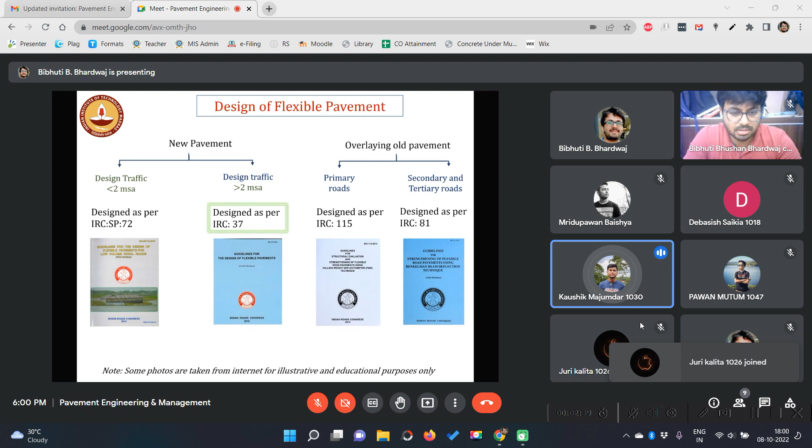So you guys are back to Jorhat or at your houses now? Sir, we still have our holidays up to tomorrow, so we'll be back. Okay, so by tomorrow. So is any one of you doing 7th semester projects in highway or related to transportation? No one? Sir, our projects have not yet been decided. We have just only been given our groups. Okay, okay.

So how is the placement scenario in JIST? So last year, what is the percentage? Sir, we are not actually that aware of the placement scenario. We do not have any ties with specific companies which give us placement, so the students do it mostly by themselves. But this year, they are supposed to bring some campus placements. So you are which batch? Like the first batch graduated in which year? The civil? So the first batch was in, sir, 2020. We are the fourth batch. Fourth batch. Okay.

See, pool campus is always an option. So you better tie up with JEC, AEC, because in my case also, I was from the first batch of Tezpur University. At the time, since it was the first batch and the rank was also not that much, many companies were reluctant to come. So we explored this pool campus. We tried to tie up with AEC, then other NITs, and it worked also. In the first batch, most of the students got selected in campus placement. So we tried that way also.

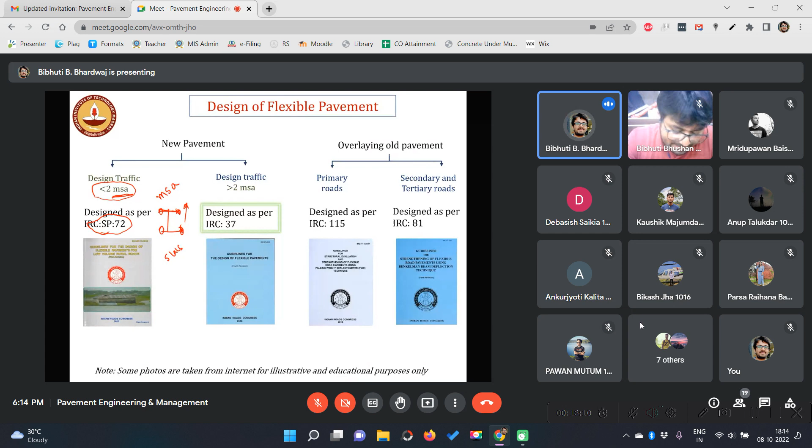MSA. Million standard axles. Very good. So what is this million standard axles? So suppose a vehicle is there. This vehicle has how many axles? 2, right? So like that, if this vehicle goes through this road for say 5 lakhs numbers of times, then total numbers of axles that passes through this road will be 5 lakhs into 2, right? 5 lakhs into 2 will be 10 lakhs. So that will be 1 million axles.

But what is this standard? Because this vehicle can be a car. Another vehicle can be one truck. The old trucks have same axle configurations, one axle at the front, one axle at the back. So do you think the damage caused by this car and the damage caused by this truck will be same? No. The damage caused by this truck will be always higher. How much higher? That we will discuss in details.

Okay, but just remember this million standard axles means, suppose you are designing this road for 15 years. So in 15 years, how many standard axles will pass? So that count is called standard axles. How many million axles? Say like 6 into 10 to the power 6 is the total axle count. So we can call it directly 6 MSA. So 6 MSA means that road cannot be designed as a rural road.

We have to move to this category, that is just a normal flexible pavement. In most of the state highways, even major district roads, national highways, expressways, the traffic will always be greater than 2 MSA. Alright, so in that case, we will focus in this course mainly on IRC 37 because IRC SP72 is very simple. Some standard thicknesses are given, so you need to just check whether it is enough or not. So this IRC 37, you have to master it because many questions come, especially in GATE, in interview also.

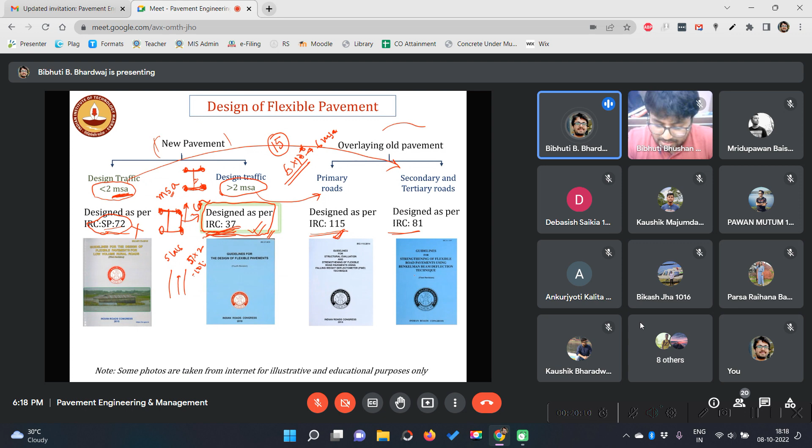Now coming to design. So when you say designing a road, what does it basically mean? Does it mean the width of the road? Does it mean the curvature? Does it mean the thickness? What do you think designing a road means in the context of pavement engineering? Yes? Selection of materials and determining the thickness. Yeah. So in the context of pavement engineering, designing a road always means you need to find out the thickness of different layers, and also you need to determine what are the materials to be used in all the layers.

Just like in building, from a layman point of view, when you tell someone that I am designing a building, the person will think that some kind of aesthetic beauty is attributed to the building, how the sunlight is coming, all those things. No, that is the job of an architect, not an engineer. So as an engineer, what do you design in a building? Anyone? So the dimensions of the various columns, beams, and the structural elements.

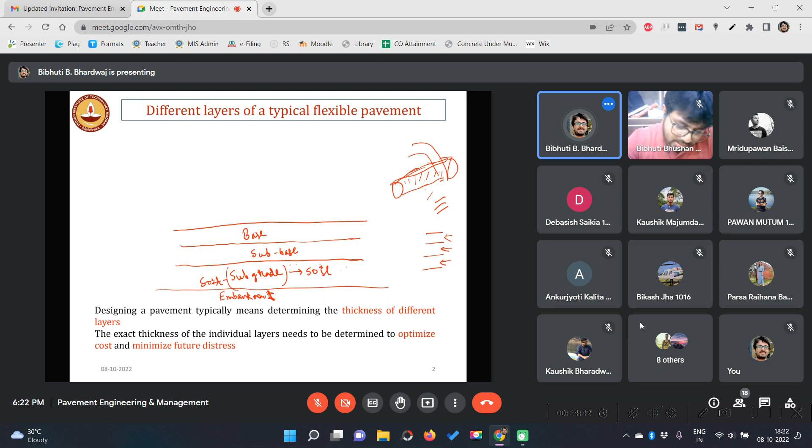Then, sir, subbase course. Subbase, very good. Subbase, and over that, the base, over that, binder. Binder, and what is the... surface course. Surface, or we also sometimes call it wearing course. Okay, so why do you think we need different types of layers? Does it have anything to do with the function of layers? So which layer is the most expensive one? Would you tell me which is the most expensive layer?

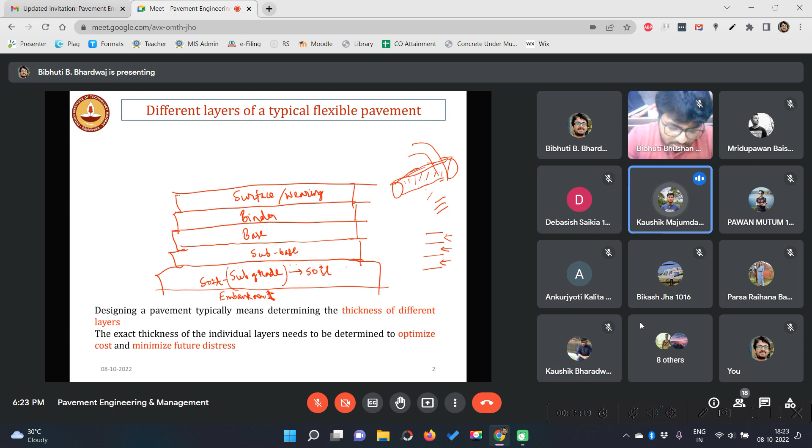Surface course. Surface course, because we use bitumen. Bitumen is also called black gold because it's very costly. 1 kg of bitumen is almost 45 rupees per kg. Okay, so that's why bitumen is called costly, and that bitumen we are using here. So this, of course, is a very expensive layer. Okay. So then we have binder course. So in binder course also bitumen plus aggregate. In surface course also bitumen plus aggregate.

In base course, what do you have? What do you think? Something inferior to this layer, bitumen plus aggregate, but superior to soil. What do you think? So only aggregate. Aggregate. Okay, but aggregates, don't you think it will be very loose? It will not be bound together. If you think about surface course, these aggregate particles are bound by this bitumen. Bitumen is a binder, isn't it?

Just like concrete. In concrete, the binder is cement plus water. Cement plus water becomes a hydrated product, so it binds the aggregate together. Right. So similarly, in bituminous mix, the bitumen is a binder that binds the aggregate particles together. Okay. So what do you think? What material will bind these aggregate particles here in base as well as in subbase? So soil. Soil. So I will ask a question now.

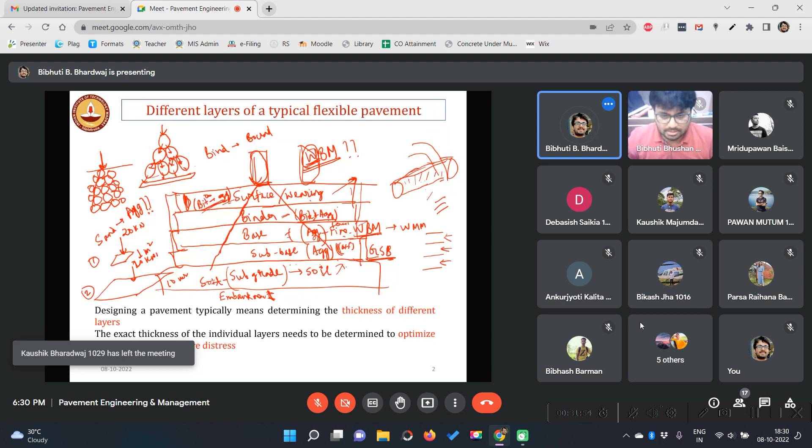So if my area is suppose 1 meter square, and I apply a load of say 20 kilonewton, and if my area is say 10 meter square and I apply the same load 20 kilonewton, so where stress will be more, case 1 or case 2? This one. Case 1, because stress is basically force by area. So since the area is increasing because of this contact of the aggregate particles, the area is increasing when we go down.

Okay, so what do you think? The stress here, if I take a point here and if I take a point here, where stress will be higher? Here or here? 1 or 2? So 2. Why? Anyone else? No, sir. It was my mistake. It's actually 1, sir. One. Yes, sir, because the area is much smaller.

Area is smaller here. So similar, just like this example. Okay, area is smaller here. So the same load, area is smaller than this one. So here stress will be more. Suppose I call this sigma 1. It's my stress at this point, and at this point my stress is sigma 2.

Okay. Now, in any kind of design, let it be building design, let it be road design, let it be even some mechanical design, as an engineer, what we have to ensure? That something doesn't fail. To ensure that something doesn't fail, what do we have to ensure? If I say that, so if I have a concrete cube, you must have done this test, right? Test of concrete cubes. You prepare concrete cubes, you apply load, right? So you are increasing the stress basically, right?

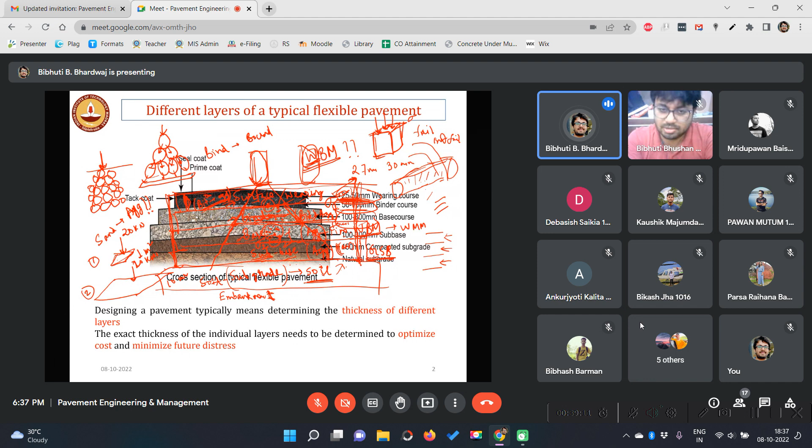Anyway, there are some other layers also, like seal coat, prime coat, and tack coat. So are you aware of this? What is seal coat, tack coat? Yes, sir. No. How to remove?

Okay, so this seal coat is applied on the top when the final layer is applied. It is basically a mixture of bitumen emulsion and sand. It is just sprayed on the top. You must have seen some kind of spray at the backside of the truck. So this is seal coat. Sometimes it's sprayed with some sprayer also.

So this seal coat, as the name suggests, will seal the pavement, because sealing it is very important. Otherwise, if water percolates through the pavement, it will be a problem. Say these aggregates are now bound by bitumen. We have used bitumen to simply keep the aggregates in place, right?

But when water comes in contact with this mix... in cement concrete it's the other way around. We need water to come. For which reaction, for which mechanism? Why do you need water in cement concrete? Come on, as a civil engineer. Sir, for setting. Yeah, the process is called hydration, right? Because it will lead to the hydration of cement. But in case of bituminous mix, it's the other way around.

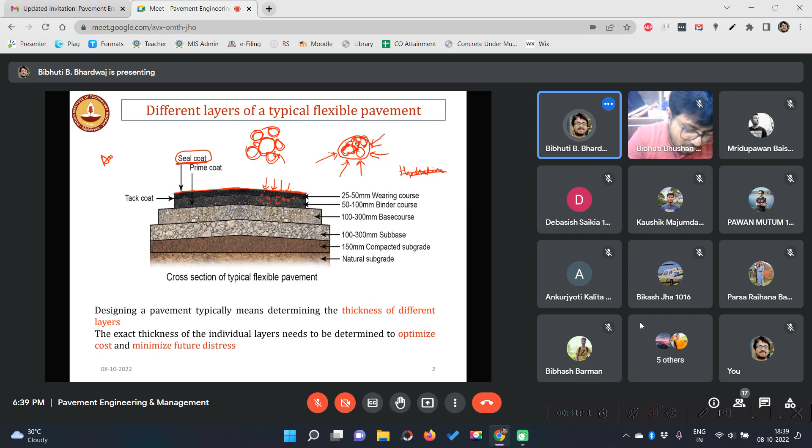These aggregates are coated with bitumen, and they are together. So when water comes, generally these aggregates are called hydrophilic. Any idea what hydrophilic means? Attracted to water molecules. Yes. So this word philic means attraction, and what is the opposite of philic? Phobic. So hydrophobic means it hates water, but philic means it loves water. So this aggregate loves water.

But forcefully it is married with this bitumen. Now when water comes, since the aggregate loves water, it will tend to get attracted to the water, and because of this the bitumen coating comes out. We discussed in our last class what happens when the bitumen coating comes out. The aggregates are no more bound. Bitumen is the binder which was binding the aggregates in place. When the coating is not there, the aggregate will be loose, so whenever a vehicle comes, the aggregate will come out here and there. And like that, what is created?

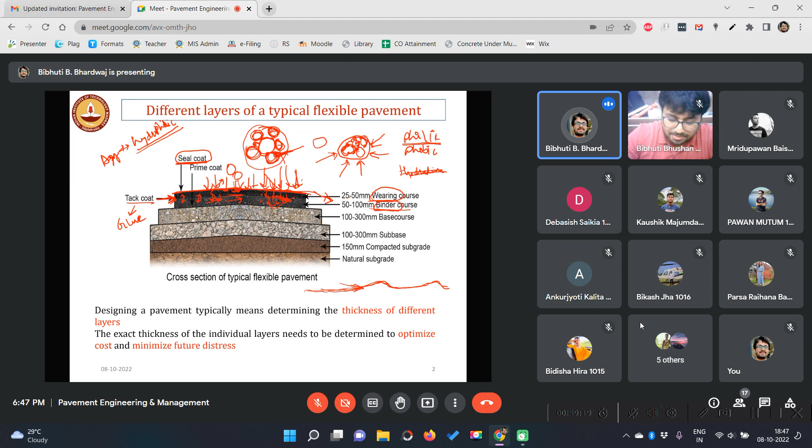We learn these things in detail when you study rehabilitation of pavements, but it's called shoving or sometimes corrugation, some wave sort of thing. You will see this is where the brake has been applied, this is where the brake has been applied, that's why the layer will look like this.

Okay, understood? So designing a pavement means determining the thickness of different layers, and the exact thickness needs to be determined to optimize the cost and minimize future distress. Till now everything is clear? Yes sir. Okay.

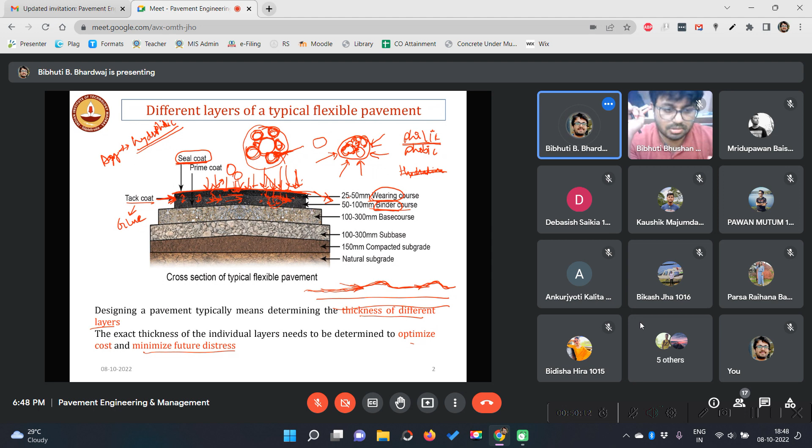See, don't take this class as your normal routine class. You have enrolled this course just to learn something new, isn't it? So you will learn. If you have any kind of doubt that comes to your mind, feel free to ask. There is no silly doubt, every doubt is very genuine. So don't hesitate, you can ask any question related to this course. Any random thought that comes to your mind.

Cracking due to fatigue, not just repetitive strain. Literally, what does fatigue mean? In English, tiredness. So anything that gets tired, you can say the body is in fatigue. When you put in effort relentlessly, working and working, you get tired, right? Just like that, when the pavement gets tired, it cracks - that's fatigue.

Okay, how will pavement get tired? Suppose I give you an aggregate and ask you to break it. Forget about the aggregate, let's say this is a mouse. I have asked you to break this mouse. So what are the options you have? How will you break it?

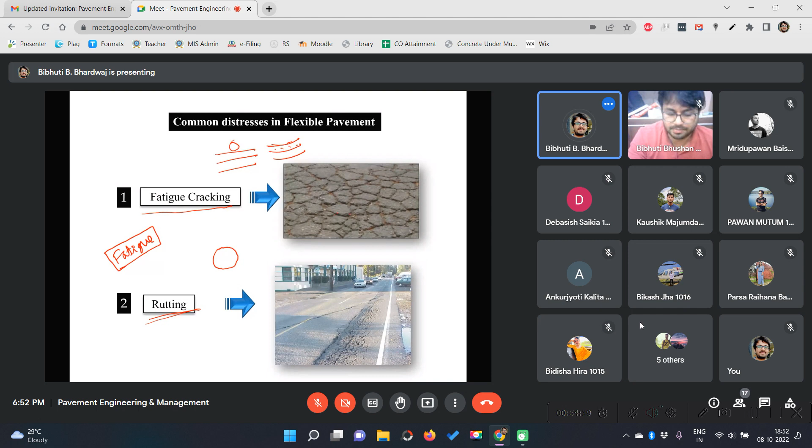So brakes also fail in fatigue, right? When a vehicle moves, the brakes work like this repeatedly, and ultimately it will fail. Similarly, roads also fail in fatigue because flexible pavements flex - flexible means it bends. So when a vehicle comes over this layer, it will bend. Then when the vehicle goes, it will recover - bends, recovers. So when it recovers and bends like this repeatedly, the layer will get tired, and when it gets tired, cracks will appear. That's what is called fatigue cracking.

Okay, rutting - what do you think? Why does this rutting appear here? Along the wheel path where the vehicle moves, you can see some depression. Let me draw the cross section view - it will be like this. Why do you think it happens? Due to some relative deformation of one part of the road. But what can be the fault in that road because of which it is happening?

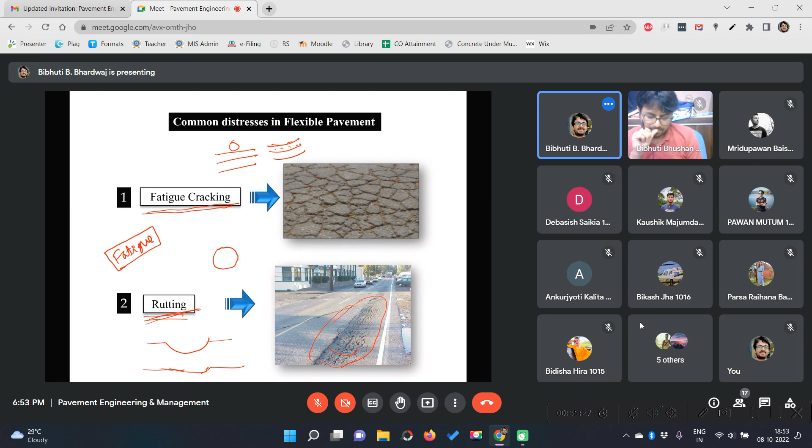So this fatigue cracking is a failure which results from repetitive action of loads. That means you are applying the same load repeatedly, again and again, and ultimately you will see some hairline cracks. It starts with initiation, always with some hairline cracks. You understand the difference between hairline cracks and structural cracks, right? In wall plaster also you see some cracks that are very minute - those are hairline cracks, but these microscopic hairline cracks will develop into some wider cracks.

Macroscopic cracks means you can see with your naked eye - you don't have to see with a microscope. Much wider cracks will be formed, and then these wider cracks will coalesce, meaning they get interconnected with each other, and they form a network of cracks. This network of cracks looks like the back of an alligator or crocodile. So in many textbooks you will see this term also - alligator cracking.

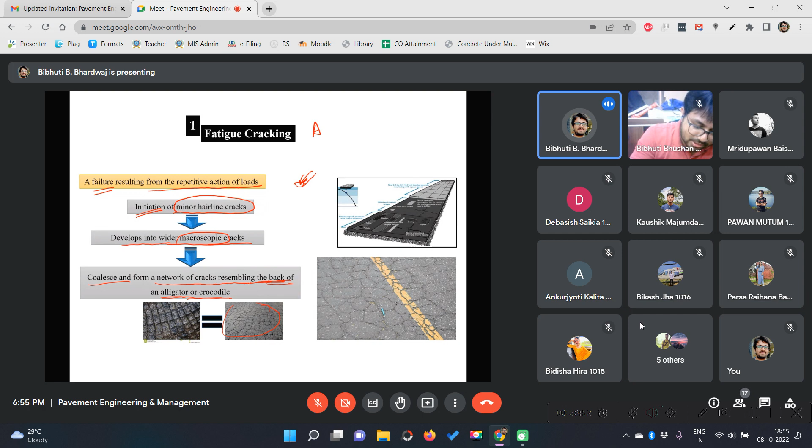Alligator cracking, and rarely in some other textbooks you will see crocodile cracking also. Mainly alligator cracking is the frequently used term for fatigue cracking.

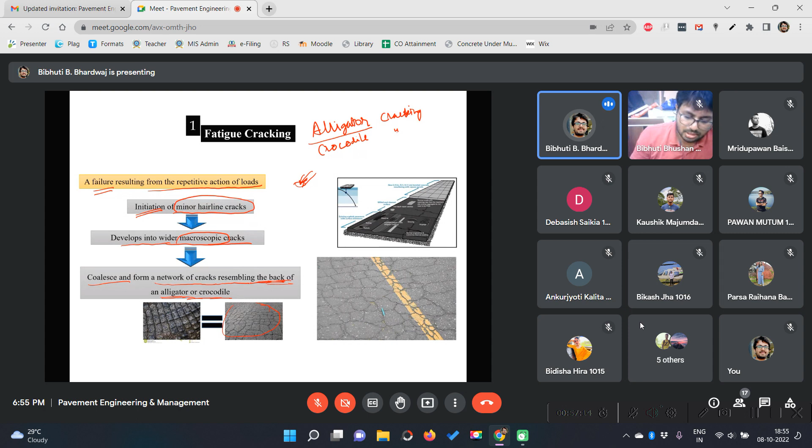So have you understood what fatigue cracking is? Yes, sir. Okay, now the causes can be many.

Mainly it is a decrease in the pavement's load supporting characteristics, because these are the layers. Suppose this entire system is acting in a very good fashion, then it will not fail. But because it is getting flexed and recovering, if these layers are good enough, it will not flex much. But if these layers are soft, it will flex much higher, like this. Or even if these materials are soft enough, it will flex too much. So when it flexes too much and recovers again, just like that, again it will be like this.

So where do you think the cracks will appear first, at the top or at the bottom? So at the top. Why? Because the pressure at the top is much higher.

No, it is not. See, that is the difference between fatigue cracks and cracks formed because of higher loads. Both are cracks, but fatigue cracks are because of getting tired.

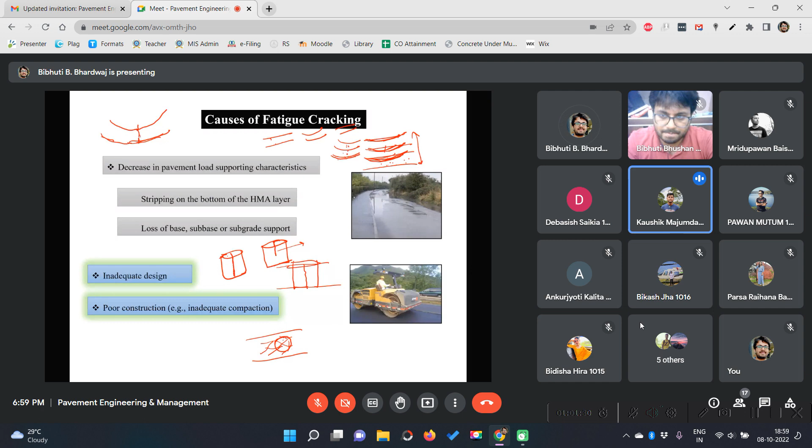Have you understood this phenomena of fatigue cracking? Yes, sir. Okay, so now why will this fatigue cracking happen? Have you ever done any experiments on bitumen, related to bitumen?

No, sir, we have never seen bitumen. We have seen bitumen and we have been given some demonstrations, but we have never done it on our own. But you have an idea how bitumen behaves, right? Yes, sir.

So how does bitumen behave? Is it a solid, a liquid, a semi-solid? How does it behave? It's a semi-solid, sir. At which temperature will it be semi-solid? Sir, at higher than room temperature, like 60 to 70 degrees.

If I heat the bitumen to say 150 degrees centigrade, will it be semi-solid? No, it will be liquid. It will be like water, it will flow like water. You can simply pour bitumen and spread it like anything.

That's why bitumen, when mixed with aggregate, is heated to say 150-160 degrees centigrade so that it becomes like water, very, very less viscous. Then if we simply mix the aggregates, with time the temperature will reduce and ultimately it will become solid again. Then the aggregate particles and the bitumen together, the bituminous mix, will be in a very solid state.

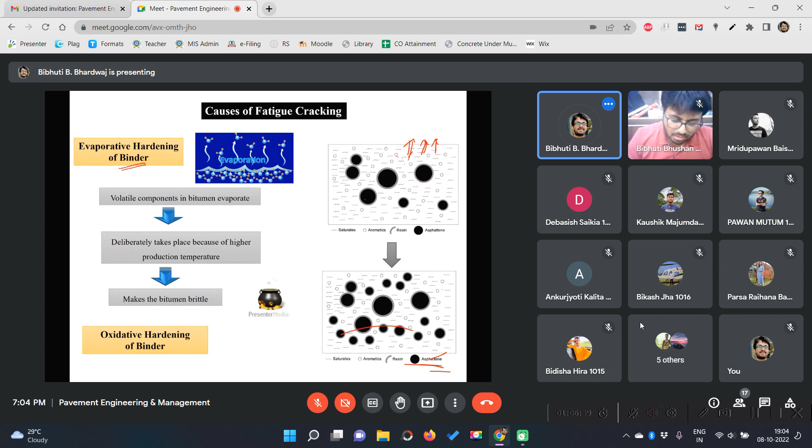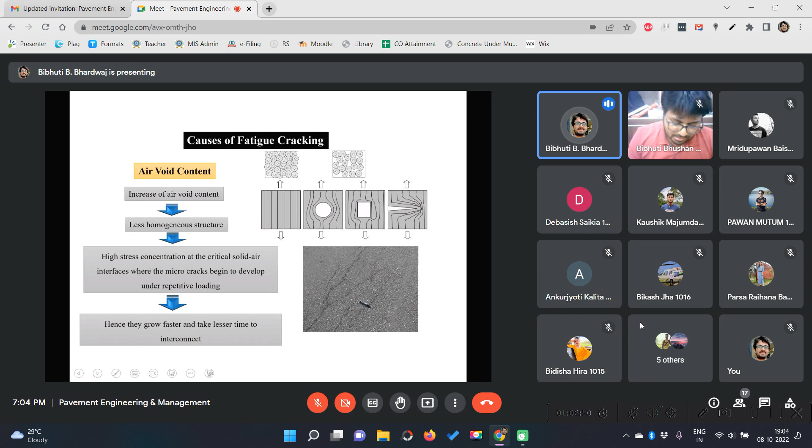Okay. Anyway, not going into that. But I will come to that later. These are again some advanced things. I thought I'll cover this, but let's not discuss. But yeah, coming back to rutting now. I think fatigue cracking you have understood. So why did I discuss this brittleness of the bitumen? If the bitumen becomes brittle, when it flexes, it will crack easily, right? So with time, it will anyway fail in fatigue.

So fatigue cracking, we cannot prevent. It will anyway fail, but we can delay it by using good bitumen. Mix proportion should be good. Testing the bitumen before. So by doing that, we can simply delay it, at least to the design life. Okay, but we cannot prevent it. It will ultimately fail in fatigue.

Okay, I can give you this example. The buckets you use at your home are made of plastic, right? When a bucket is newly procured, you can carry much water with it without fear of it failing, right? It will not break. But when you keep the bucket outside under the exposure of sunlight, say for 1 year, 2 years, what will happen?

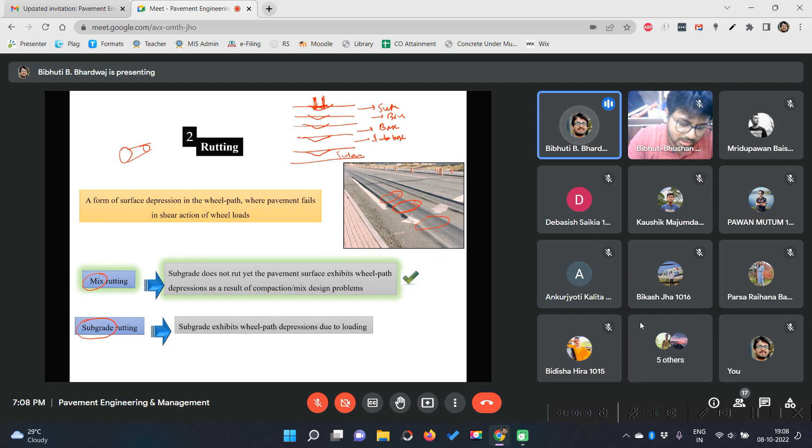And also, suppose the soil material is good and has very good strength, but it has not been compacted well, meaning the rollers have not passed sufficiently. Then the density will be lower initially, but with the passage of time these depressions will be formed. Do you agree?

Yes. Okay, but it can also be that the subgrade is good, and the problem was in the mix only. Everything is good but the topmost layer is not good; then also you can see problems like this. How will you differentiate as an engineer when you go to site and see problems like this?

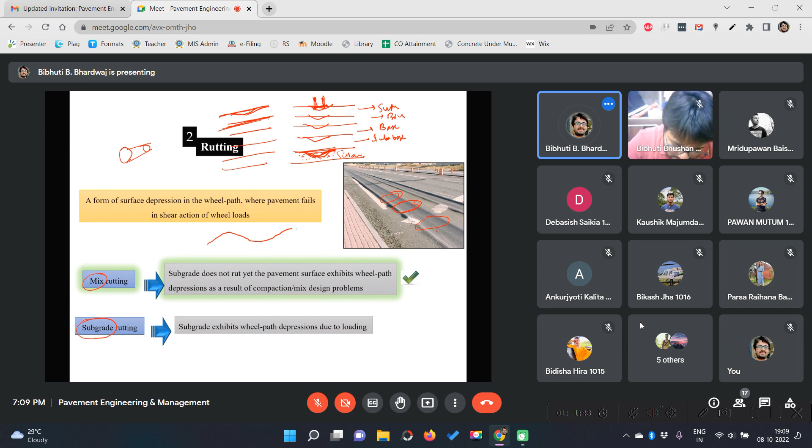If you look at the site and see that this material is heaved, that means when the vehicle wheel load comes, this material is sheared off, because the material has to go somewhere, right? So if it is sheared off like this and some heaps are present on both sides, like here, then it is a case of rutting due to the mix.

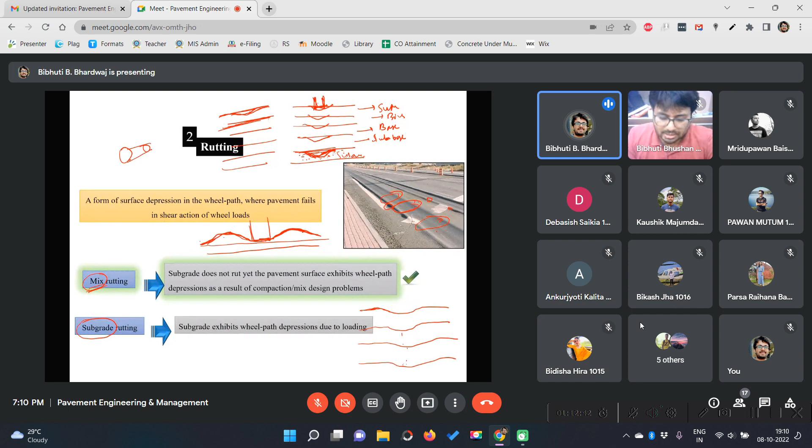But if the problem is in the subgrade, then you will not see any kind of shear; it will be like this, because it is coming from the bottom. You have understood rutting, right? What is the main problem? Mainly problems in the subgrade. So you should check whether the subgrade is good enough. These are some causes of rutting.

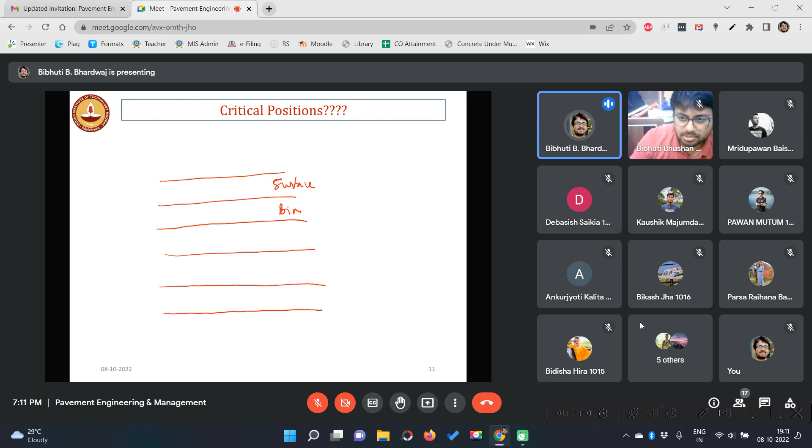So now, since you already know what fatigue and rutting are, can anybody tell me the critical positions in a pavement where you need to check for fatigue and rutting? This is my surface course. Can anyone help me with the names of the other layers? Surface course, binder course, or base course? You already answered that. Anyone else?

After surface, binder, very good. After binder, the next layer will be base. Base, very good. Bidisha, what will be the next layer after base? Sub-base, very good. Then subgrade.

See, you are paying attention. I thought most of the people had simply joined and were doing household work. It's not like that. Good.

So now, what are the critical positions where you need to check for rutting and fatigue? Say these two are bitumen, and we know a tack coat is there, so we can consider this as a single layer, the bituminous mix. This also we can consider as a single layer because it is basically aggregate plus water. This is again a different layer, which is soil. So I have simplified these many layers into only 3 layers: bituminous, aggregate, and soil.

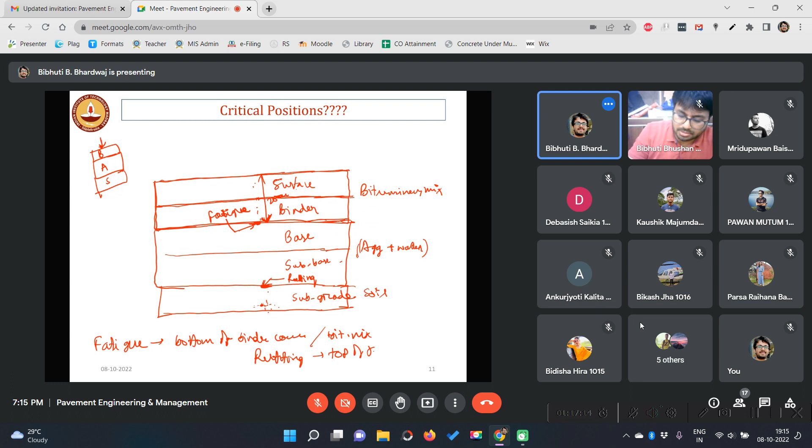So fatigue, where do you need to check? Bottom of the binder course, or we can say bottom of the bituminous mix. And rutting where? Top of the subgrade. Very, very good. So you are all set to design the road.

See, in buildings also, why do you draw the bending moment diagram and shear force diagram? To determine the critical positions of failure. Yes. If the bending moment diagram is like this for a simply supported beam, the moment is maximum at the middle, so the possibility of failing in bending is maximum at the middle. Similarly, from the shear force diagram, the possibility of failing in shear is maximum near the edges, right?

Yes. That's why we draw this. So similarly, we don't have to draw here. It is very, very obvious that in terms of fatigue, the critical position is here, and in terms of rutting, the critical position is here. Okay, can we move forward?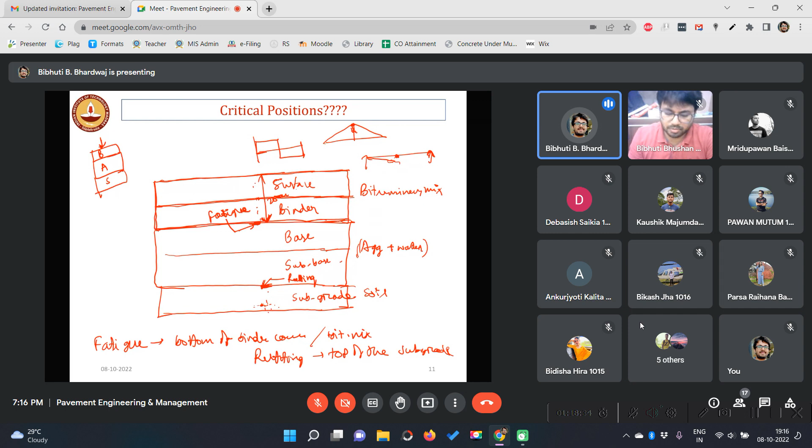Yes, sir. Okay, so this IRC 37 has given many design catalogs. Design catalog means what? See, now technology has advanced, right? So we need advanced loads. Advanced load means this. If we use aggregate here, simply bituminous mix here and soil here, that road is not able to carry higher loads. And if we want them to carry higher loads, then the thickness will be very, very high. Like this big will be the thickness.

Then the problem is we need more materials. But do you have more materials left on earth? No. Hills are being cut. Quarrying is going on. But in many states, quarrying is banned. You know what is quarrying, right? What is quarrying? Getting the aggregates from those hills, you use the blasting process, right? You have never visited any crusher plant.

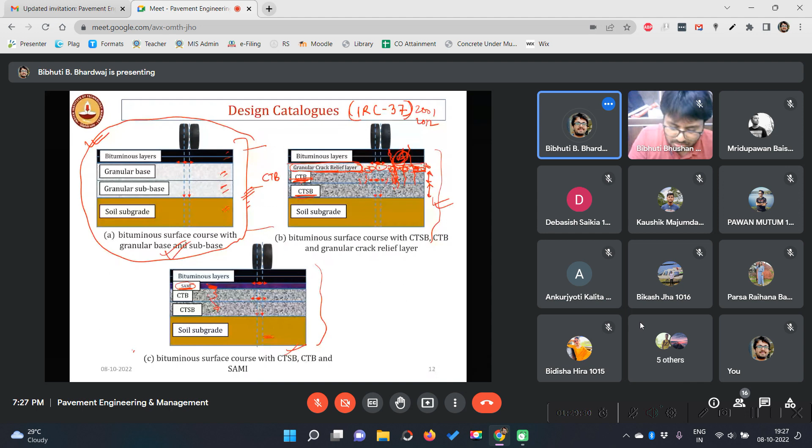But if you have noticed, can you see some red arrows in all the cases? Yes, sir. What do these red arrows mean? This is the typical position we learned in the first case, the one that we have been discussing for 1 hour. Case A: subgrade soil, granular subbase aggregate, granular base aggregate, then bituminous layers. So here you see the critical positions are at the bottom of the bituminous mix and at the top of the soil. And mainly this kind of failure occurs where the wheels are present.

So we can check different points, as we learned when we used the software KENPAVE, how at different points we can find out the strain and stress values. But the critical points are at this depth and at this depth. Here you see, along with these, in between also we need to check for fatigue because this is cement treated. When you mix cement, the material becomes stiff, so there is a chance that stiff material will fail in fatigue quickly. It cannot flex very easily, so it will fail.

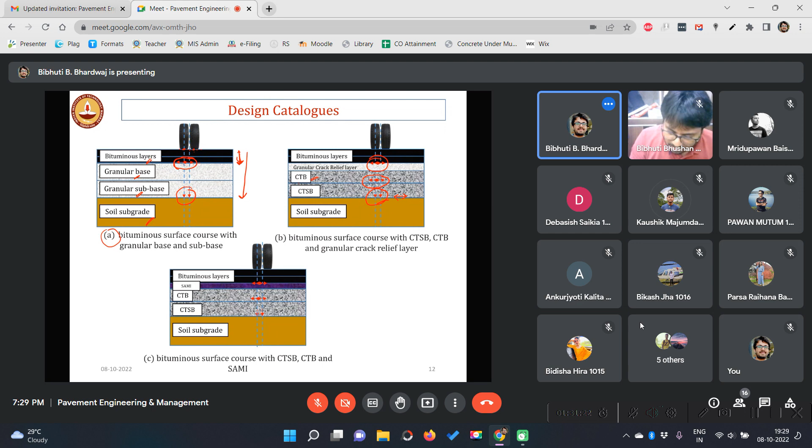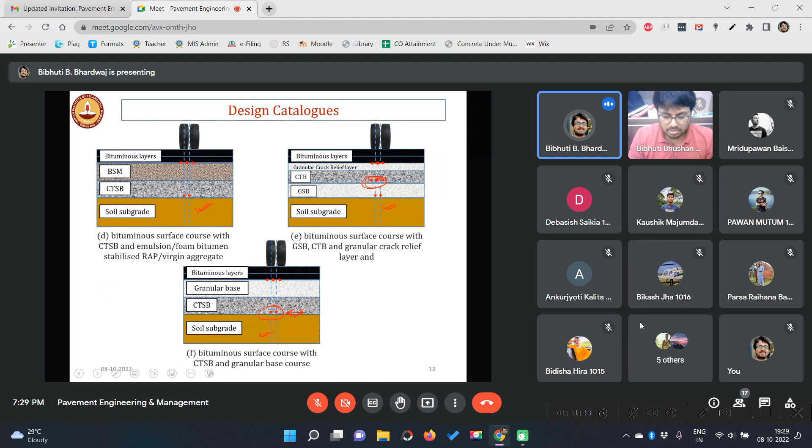Understood? So here also you can see, additionally. Similarly here, only here. Here CTB is there, so additionally here, here, and here you can check also. Understood these design catalogs? Yes, sir.

As you can see, in IRC the most commonly used flexible pavement structure is catalog A. That means we will solve a numerical from start to end for this catalog only, catalog A. So generally dual wheel, you can see nowadays single wheel trucks are not mainly used. I am drawing the back view or front view. On both sides there will be two wheels like this. Single wheel trucks are very rare nowadays; very old trucks will be single wheel. Otherwise most trucks will have two wheels on either side of the axle. This is called the axle.

This is called axle. It's called axle, and these are called wheels. So dual wheels. Okay, dual wheels. I think you have not learned tandem axle, tridem axles, those terms as well, right?

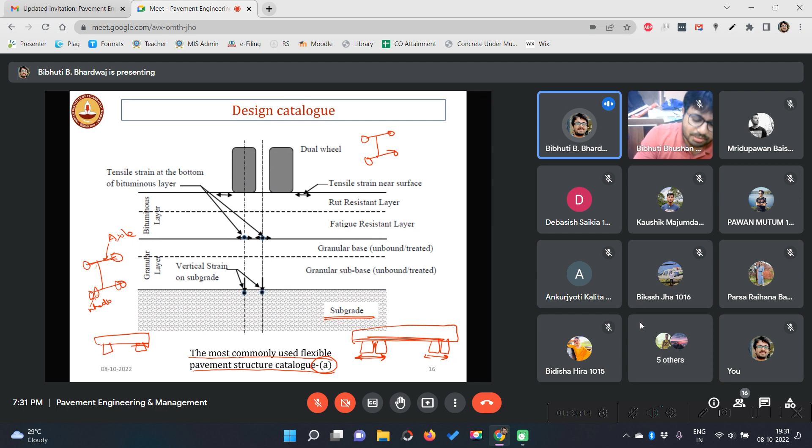No, sir. So single axle basically means, so when we talk about axles now, we never talk about this front axle, because generally if you see, if a truck is there like this, it will carry the loads mainly on its back. So if the total load of this entire truck is say P, then only P by 3 will come to its front axle and 2/3 of P will come to its rear axle. Okay, so that's why two wheels are there at the rear side and only single wheels are present on the

front side. Okay, and when you say single axle, it doesn't mean a vehicle with only one axle. Axle you understood, na? This is called axle. So can anybody give me an example of a vehicle with only one axle? So an auto rickshaw? Auto rickshaw, at least one wheel is there to take the load. Think.

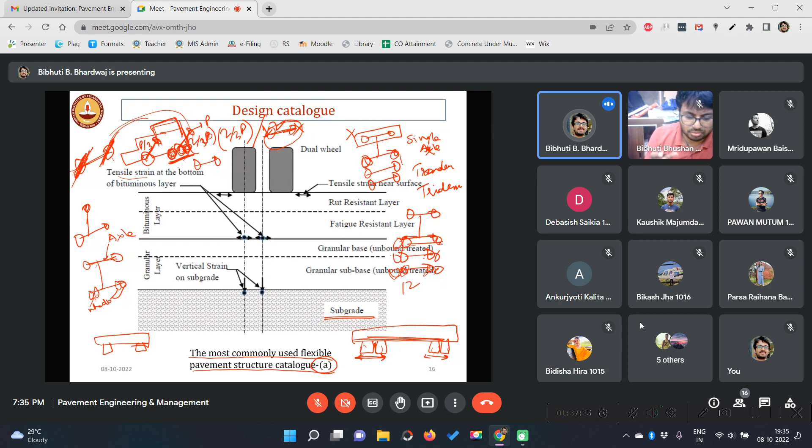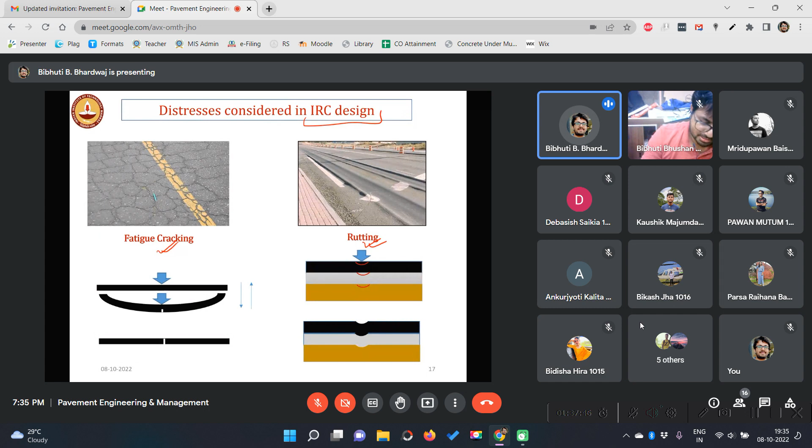So that's why single axle trucks will cause maximum damage, and tridem axle trucks, even though highly overloaded, will not cause that much damage to the road. Understood this concept of axles and wheel configurations? Yes, sir. Okay, so in IRC design, this fatigue cracking and rutting is considered. You have already learned these things.

So as I said, we need to check at the bottom of the bituminous layers and at the top of the soil subgrade. So at the bottom of the bituminous layers, it fails like this, right? Fatigue means the strain will be in the radial direction, like this. So that's why it's called tensile strain or radial tensile strain. But the strain coming at the top of the subgrade is vertical in nature, it's coming like this. So that's why it's called vertical strain.

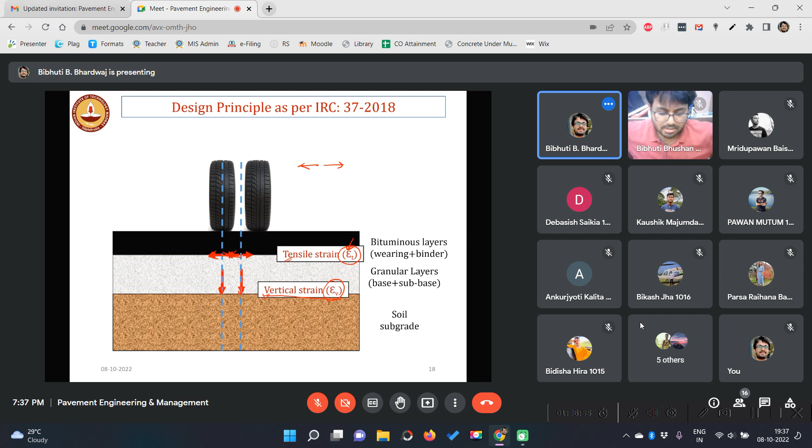So tensile T, we will call it epsilon T, and vertical V, epsilon V. Strain is denoted by epsilon, that you know, I think. Right? Yes, sir. Okay. So now the design criteria. As we already discussed in the very beginning of this class, the strain should always be lower than the strength.

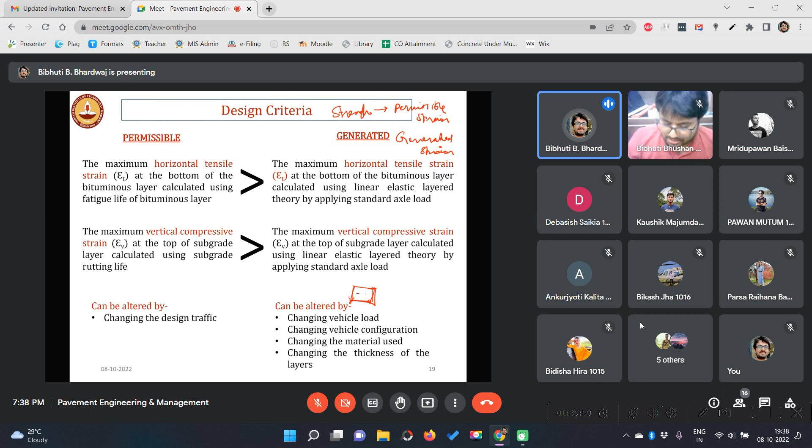Strain should be lower. If strength gives me permissible strain, and whatever is generated is the generated strain. Permissible means if my material is this one, the strength will have some permissible limit before failing - it can carry a strain of this much, whether tensile strain or vertical strain, but it will have some threshold limit.

Those threshold values I will call permissible, and the generated strain is coming because of the wheel loads. So permissible should always be greater than the generated. What kind of permissible strain? The horizontal tensile strain at the bottom of the bituminous layer - it should always be higher than the generated horizontal tensile strain at the bottom of the bituminous layer.

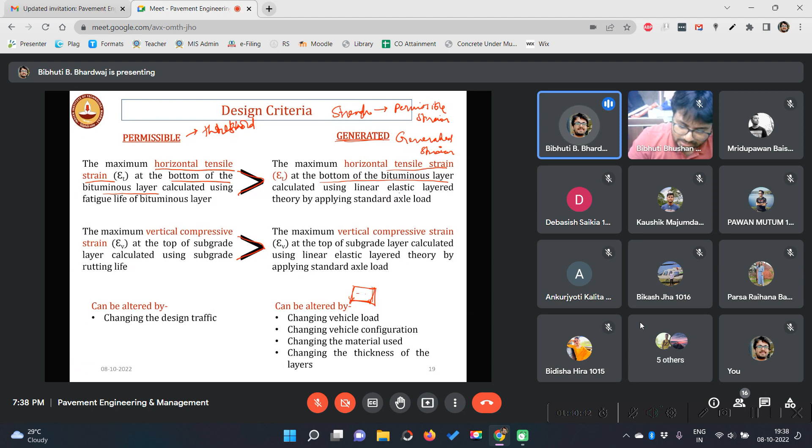This linear elastic theory I will cover in my next class, by applying standard axle load. This part is coming because of the load, and this is coming because of the material or layer properties. So what kind of material you are using, you already know. That material will have how much threshold limit, you should be knowing. Then you test whether the generated tensile strain is crossing that value or not.

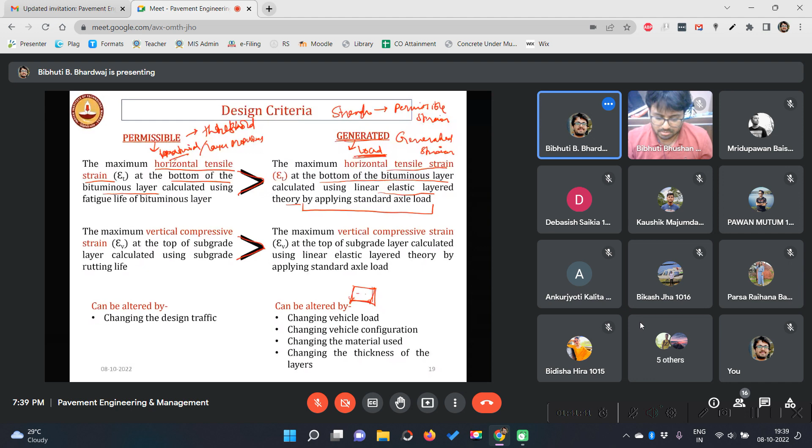If it is crossing, then what you should do? You should increase the thickness. Then the generated strain will get reduced, and the permissible will also get increased. Understood? Yes, sir. Okay.

I can continue, but generally attention span is only 45 minutes at undergraduate level, so I see many people leaving. Shall I continue or shall I stop? Nobody will say to continue, but I will stop because this is a new topic - design traffic - from which we will enter into designing flexible pavement. But I want to know, are you getting interested in this course?

Yes sir, okay. This is a tricky question because I want to take an extra class tomorrow if you are interested, since I need to complete my syllabus. Are you free? Out of 16, also like 6 or 7 people are not interested, they're just running for the namesake. It happens like this - in my old days, out of 100, since I don't take attendance, always 30 people will be there, and I like teaching those 30 because they are interested. So I don't mind if 10 or even 5 people are there, but those people should be interested in learning new things.